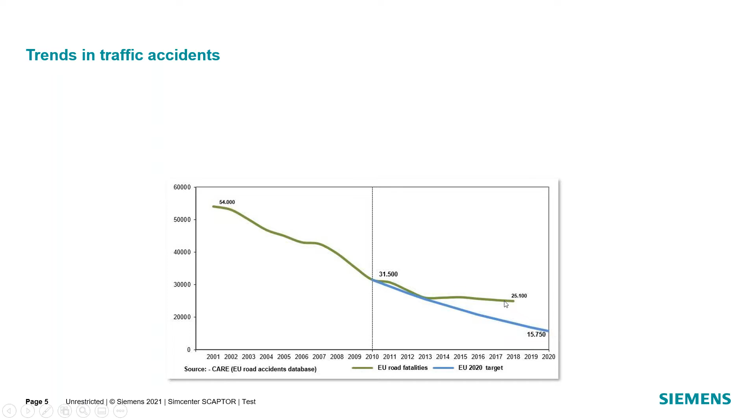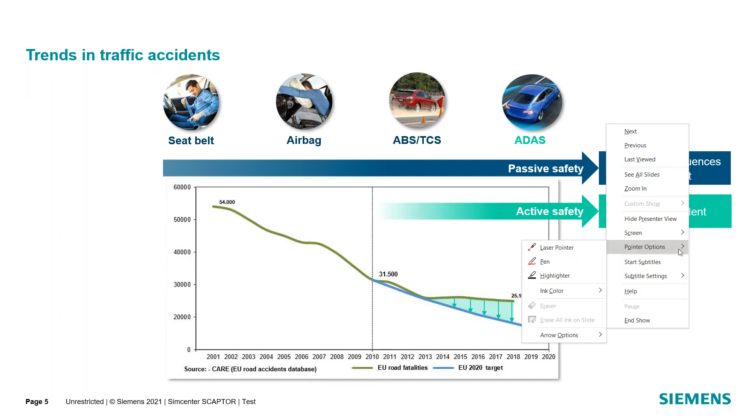The decrease was certainly due to passive safety measures such as seat belts and airbags, ABS, traction control systems, and whatnot to mitigate the consequences of an accident. But it became clear that to gain any more improvement, there was going to need to be something else, some active safety measures to prevent accidents as well as the passive measures. So that's where ADAS came in. This acronym stands for Advanced Driver Assistance Systems. That could be things like automatic braking or lane keep assist. Maybe some of you have these systems already on your vehicle.

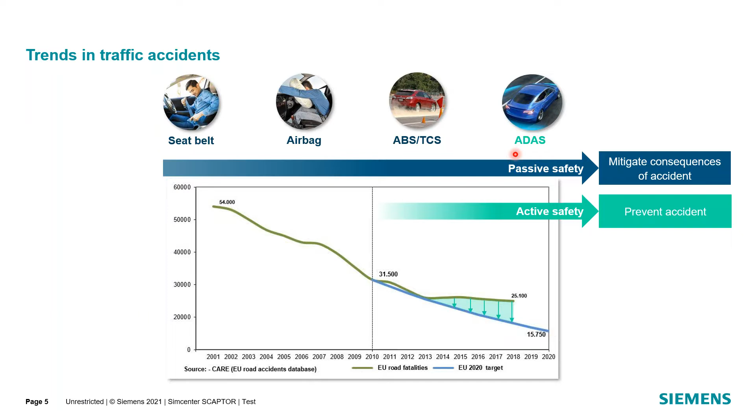So that is one step towards preventing deaths from accidents, but as well, many of you probably know there's big work being done right now in autonomous vehicles, so completely full robotic taxis, basically. And we can classify it. The SAE came up with six categories, going from level 0 to level 5, defining different levels of automation. Level 0 being no automation, just driver only, all the way up to level 5 where it's full automation, like that robo taxi, that dream you have of falling asleep in the car and waking up at your destination safely.

We're not quite there yet, but we're working towards that goal in the industry. And a lot of vehicles, I'd have to say, we're firmly in level 1, Charles. Wouldn't you agree? Yeah, I would say. I mean, a lot of vehicles do have the auto cruise and automatic braking, lane keep assist, things like that.

But as you can see too, I would think you agree, guys, the sensors required to reach level 5, as you can see from the graphic here, steadily go up, and that's some of the things we're going to talk about: the process of getting to level 5 at some point in the future down the line, and what type of sensors we need to be able to achieve that goal and capture that data.

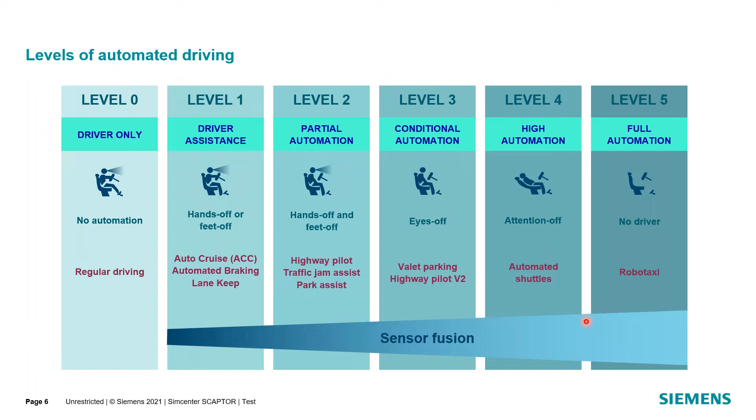I guess along the way too, we should talk about the development process. A lot of times when we talk about vehicle development, software development, you may see a V diagram for the development process. Whereas here, when we talk about autonomous vehicle development, we like to think about it in this closed loop process.

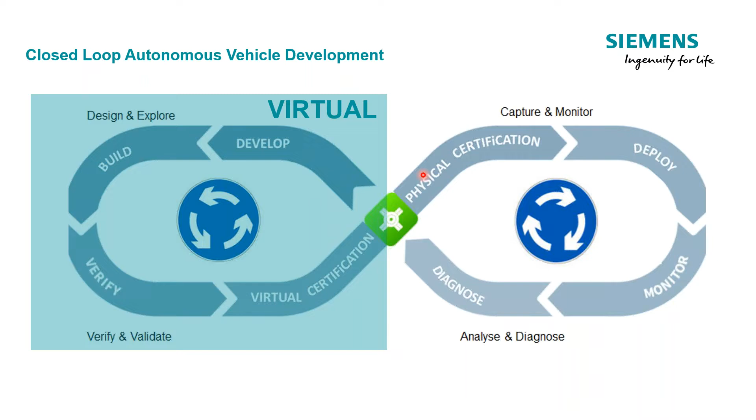So we would maybe start here in the virtual side of things, developing our sensors, our vehicle, our algorithm, verifying how things are going to function virtually, doing some certification work, and then we would move into physical testing of the systems that we develop. By deploying it into the field, we would monitor how it behaves in different scenarios.

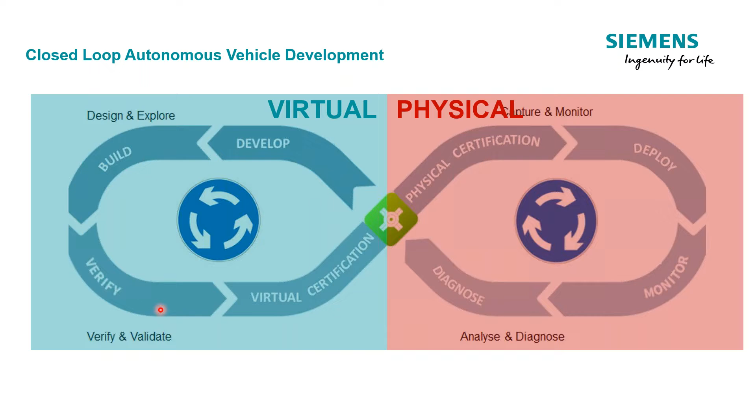Inevitably, there are going to be scenarios that the vehicle or the sensors don't interpret correctly. So we need to diagnose those, and then we go back once again into the virtual development cycle to make further improvements. And Tony's really going to focus on this Simcenter Prescan360 family of products that handle this virtual side, the development of autonomous vehicles.

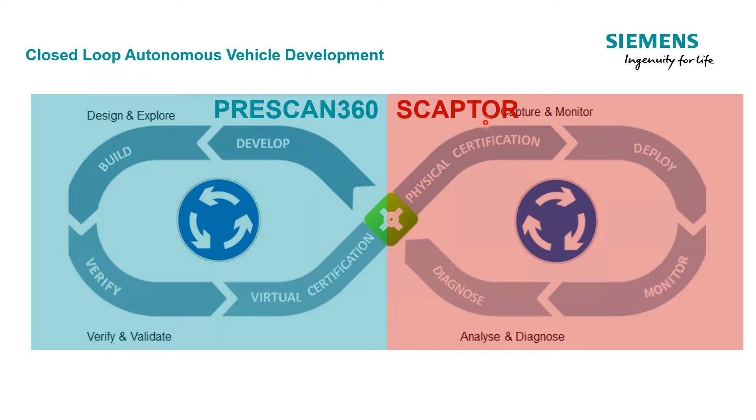And Scott and I are going to focus on what happens on the physical testing side, where we use our Scaptor solution. And if you're not familiar with Scaptor, hopefully you will be after this presentation, but it kind of stands for sensor capture, right? Capturing data from all these sensors that are utilized in autonomous vehicles. And talking a little bit more about the sensors that we need to use and why so many.

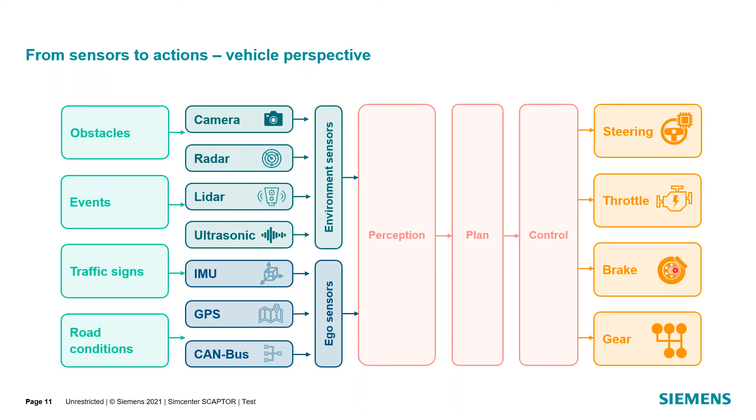And all these sensors together help us to perceive what's going on around the vehicle and on the road. And then we can plan action for the vehicle to take. And once we do that, basically we're talking about controlling the vehicle, be it a steering input, braking, whatever the case may be.

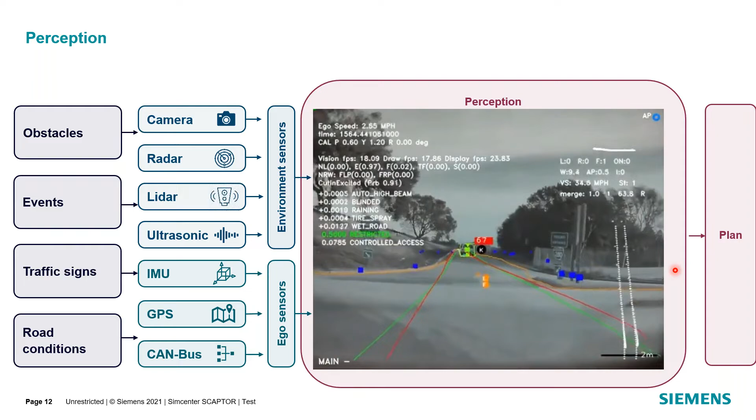And to give you an example, I have a video here that highlights some of the perception data that you would be able to acquire from all these sensors and what it needs to do, such as reading the stop sign there, noticing the vehicle that's in front of it, staying within the lane as it's going down the road, making turns, understanding the best route. So all of that perception is going to be coming from the data that we acquire from our cameras, our radars, our LiDARs, etc.

So some keys to some of the things that Charles said is you have this data explosion. Just like he mentioned, there are all kinds of sensors, and the further we go up those levels that he spoke about, once we get to that level 5, there's quite a few sensors that are going to be needed, and they're going to be multiple types of sensors. So you have this multi-sensor fusion, and all of these sensors need to work together and communicate together in order to be able to make the same type of decisions as a human driver.

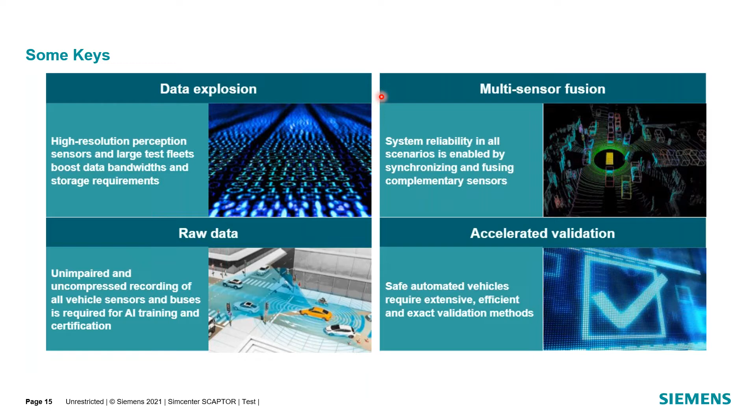Go ahead, Charles. Charles is controlling the PowerPoint we're sharing here.

So we want to get that time synchronization across all of the sensors as it's collecting that data and as we go through different driving conditions. It also timestamps the data. So if you want to mark specific events, then all of these sensors are timestamped together. And we can say, I want to look at all the left turns taken during this 8-hour drive shift. And we'd be able to do that with this system.

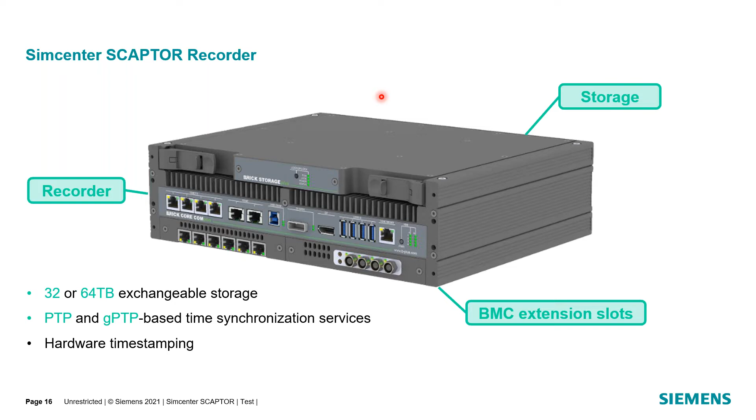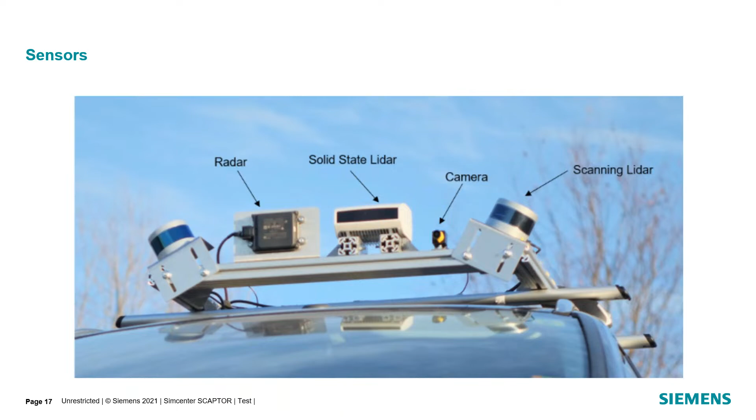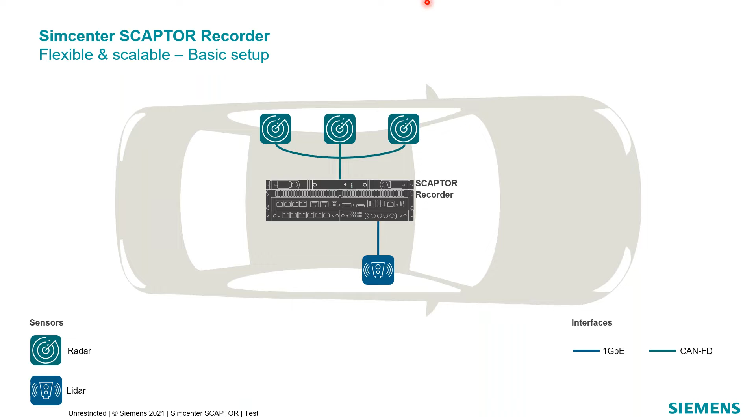So with the Scaptor system, what we want to do is bring this all into the same system, all into the same language. And this would be a basic setup where we've got maybe 3 radar systems and a LiDAR. And so I can bring all of these into the Scaptor under an Ethernet communication, directly plugging these into the system itself. We'll keep coming back to this slide and show you, as the sensors expand and get more complicated, how we bring those all together to time sync the data. But this would be a basic setup where I could use the Scaptor to start recording these 4 sensors.

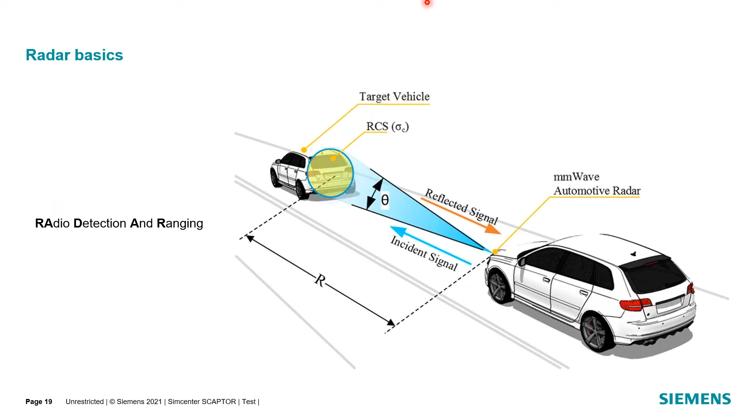So if we talk about radar and some radar basics, we're going to look at some of these different sensors and some of the strengths and weaknesses that they have. Radar, as you can see here, uses radio detection and ranging, and so it will send out this radio signal, that's the incident signal, and the reflected signal then comes back for interpretation. It'll give us some relative distance and size and show us where that potential obstacle is in relation to the vehicle that we're driving or testing. For example, this is used a lot for adaptive cruise control, where we can see how far that vehicle is in front of us. We set a distance for that adaptive cruise control of how many car lengths we want, and then the car will adjust speed to keep that distance from the vehicle in front of us.

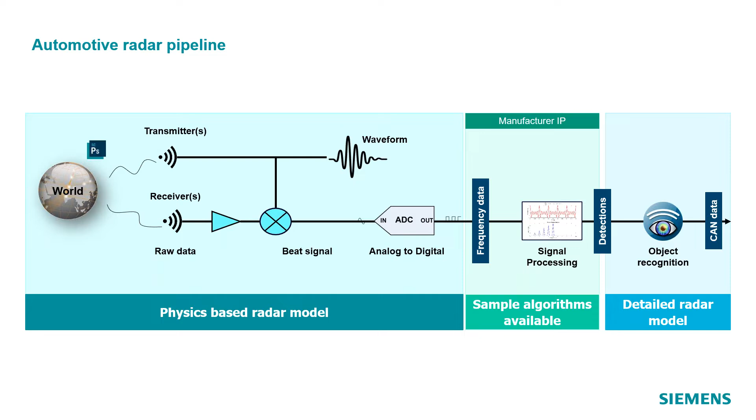The 2-dimensional FFT is going to give you data in both range, as Scott was talking about, but it also gives you Doppler. So what is range and Doppler? Range is obviously what it says: how far away is the object. And Doppler is the speed of objects relative to you in the longitudinal direction only. So it does not pick up perpendicular speed. It only picks up speed relative to where you're going. So when you look at a range Doppler, you're seeing how far away, but also how fast things are either moving towards you or away from you.

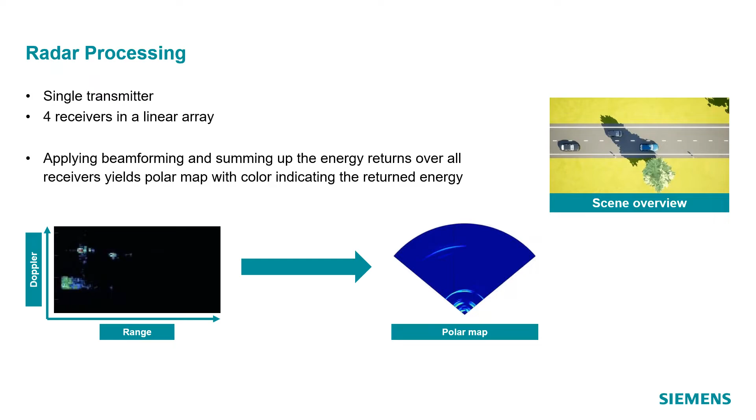So in order to get to that, you have to do this 2-dimensional FFT, so that you see that on the bottom left where we have a range Doppler as time is going on, and those dots more in the top are coming from the vehicles, and that cluster at the bottom left is everything in the scene not moving. Now, you can make a more complex system by using 4 receivers in a linear array and then making a polar map, and that's what you see on the right. So there's a lot that can be done with radar, but let's see a situation that really happened in the real world, but we weren't sure why it happened. So next slide.

All right, so this is going to be a movie. What we'll see in this movie is from an actual vehicle, a Tesla 2016, so this is real. You'll see a camera and you've got a car in front of you, and somehow we stopped in the Tesla, even though we couldn't see the car in front of that. So the Tesla saved an accident from happening. Now, how did that happen? Well, we looked at it and we knew that it had to be the radar, because with the camera, you couldn't see the car in front. So how did the radar do it?

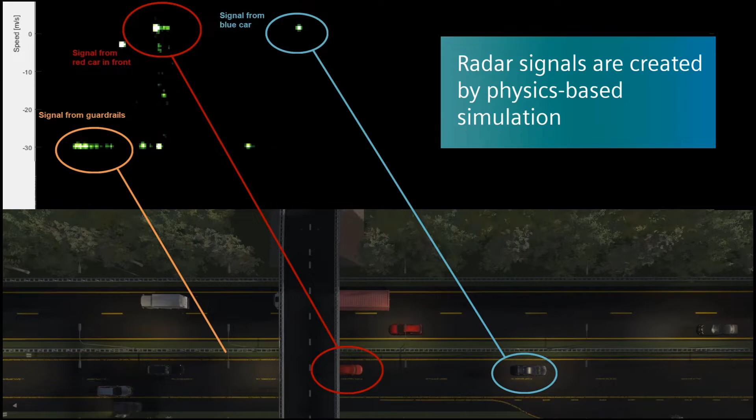So what we did was we created a simulation of it. We figured out the radar was a Bosch. We put in the parameters and went about the process of trying to figure out how it did it. Now you see the range Doppler on top, and can you pause here? It just disappeared, but that's okay. So you'll see that we have the red car in front of us producing the red dots in the range Doppler plot, and the blue circles, there's dots there. Right now for the pause it's not showing, but they are there. Trust me.

And I think we muted you.

So how did the radar get those dots? Well, because we could simulate it, we were able to figure out that the radar signal went under the red car, which was in front of the Tesla, bounced to the next car, came back under, and back to us in the Tesla. And right now what we see is that the blue car and dot is pretty far away. Range is the x-axis, so that's pretty far away. And the two sets of dots, the blue dots and the red dots, are near zero, which means they're going about the same speed as us.

And now when we start the movie up again, watch what happens to the blue circle of dots. They're going to come down and to the left, which means they're getting closer, and they're going slower than we are. So if you could start it up again.

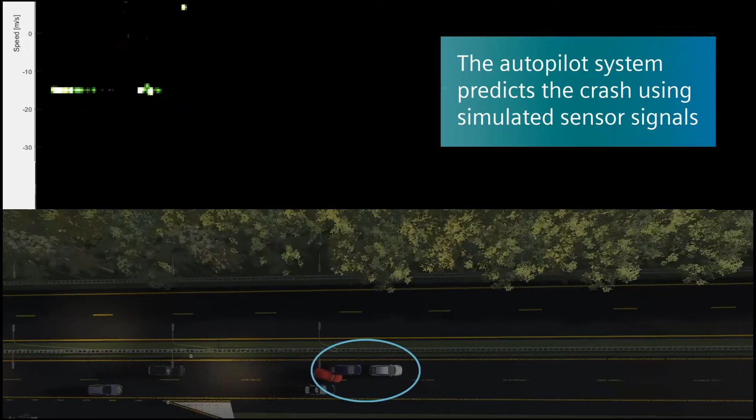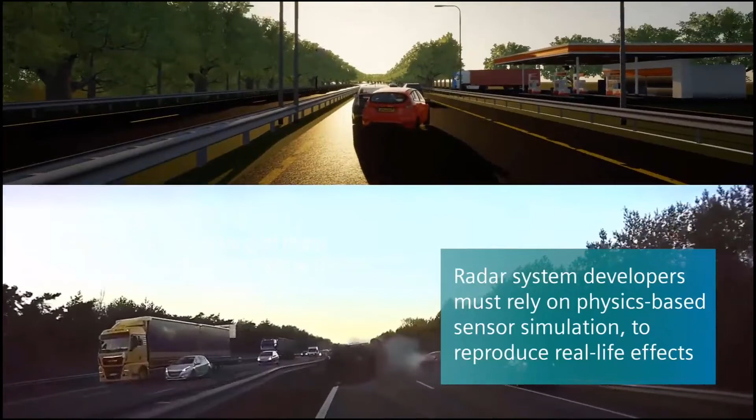And so what you'll see, here they go, okay? And what happens is, in the Tesla, the algorithm saw dots that we're getting closer to, and they're slowing down, therefore we've got to stop. So by shooting the signal under the car, we're able to see in front of the other car. So pretty cool thing, and we were able to figure it all out.

One sensor that is sometimes confused with radar based on its ability to determine depth is, if Charles goes to the next slide, this. I guess here's something to talk about first. What percentage of vehicles in production have LiDARs installed? So not radars, but LiDARs. We want to hear your opinion. We'll launch a poll for the audience to participate. And we have both extremes here as choices. It's either 99% or less than 1%.

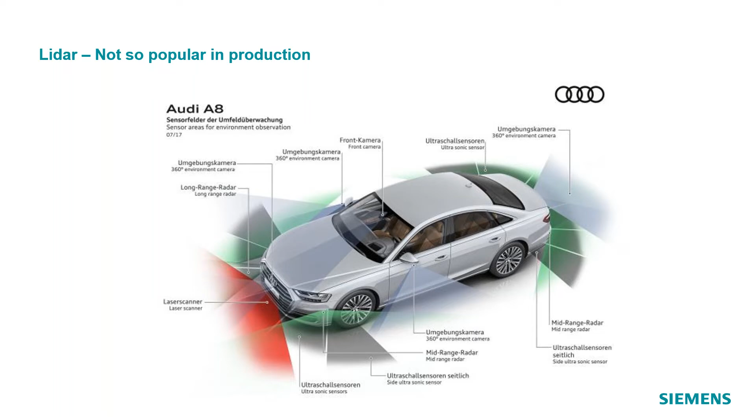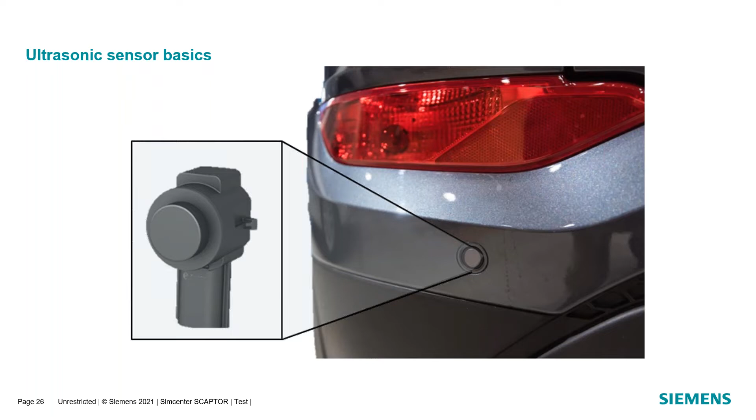The ultrasonic sensor is a sensor that actually uses sound at a high frequency to determine proximity. You can see these sensors on a lot of vehicles today that help with backing the vehicle up. Some have it on the front bumper for pulling into a garage or parallel parking to see the vehicle in front. And the ultrasonic sensor uses a high frequency noise, higher than what we can hear as humans, so we don't constantly hear these ringing tones, to determine the depth or proximity of the vehicle to an object.

And they're obviously very good, independent of daylight. They work well at night or on a bright morning. So those are great sensors that help with proximity as well. Okay, another. Go ahead, Charles. I think you were going to take the lead there.

Yeah, LiDAR is a pretty popular topic. I think some people in the audience are aware that this wasn't always Elon Musk's preference for autonomous vehicle sensors. He didn't really like LiDARs. And we'll come back to that radar diagram in a second and talk about the strengths, but just wanted to show you an example of a LiDAR system.

And that's just an acronym. It stands for light detection and ranging. And basically, oversimplification here, but it's just sending out a laser, right? And it gets a return, and based on the time of flight of the return signal, it can get a depth, and it just scans across an area, right?

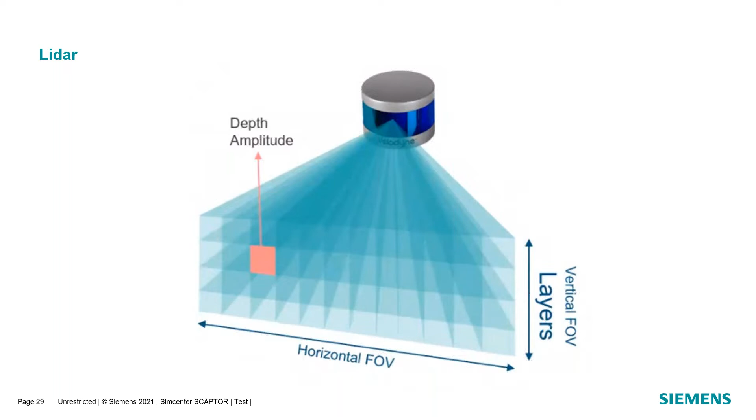To basically map where an object is, how far it is, and basically its size as well, where it's located in the space. And some examples, maybe you've seen them on some vehicles, these scanning LiDARs on a lot of vehicles that may be involved in autonomous vehicle development. They're quite large, lots of moving mechanical parts. So you can imagine this would be difficult to package in a vehicle and expensive and probably not too robust with that design.

So what has happened in the industry with advancements in LiDARs is the solid states, where they've basically simplified the system and gotten rid of all the moving mechanical parts that were used to move this laser beam around to scan an area. With this solid state, we don't have those moving mechanical parts. It's far more robust, and obviously you can see the size as well. It's an improvement from a packaging standpoint.

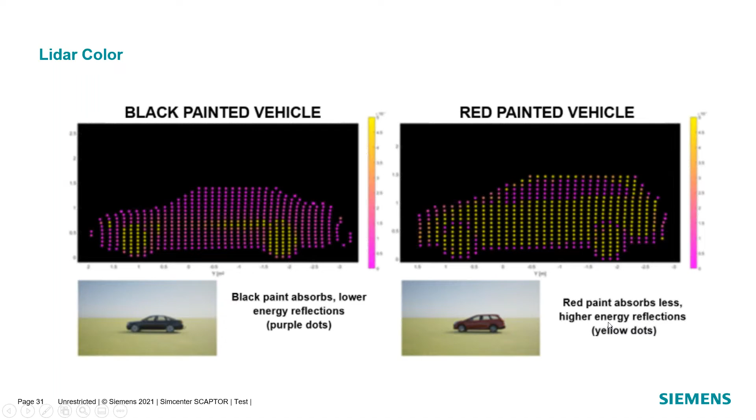And when we talk about LiDAR, some of the considerations we have to think about is, if you see this image, we have an image of a vehicle that's painted black and a vehicle that has red paint. And we can see that laser energy has a difference in energy reflections because of the black absorbing more than the red. So that's a consideration that we have to deal with with LiDAR.

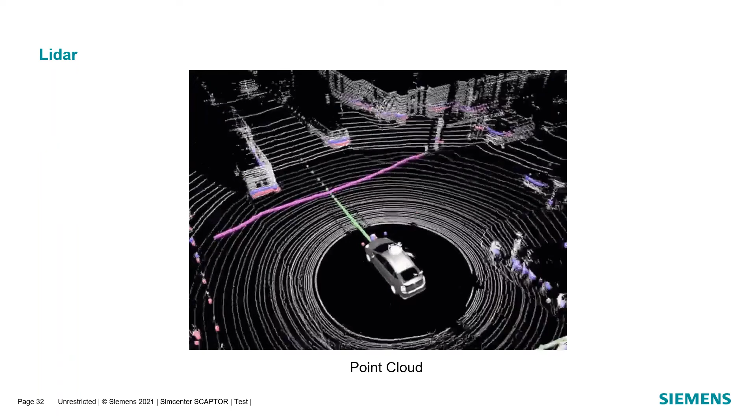Here's an example of what we would call a point cloud. This is the data that we would get from our LiDAR scanning the environment. I've got a still picture here, it moves pretty fast, kind of hard to see what's going on. But as you can see, our LiDAR is able to identify people, buildings, vehicles, as it's scanning the environment as this vehicle is moving down the road.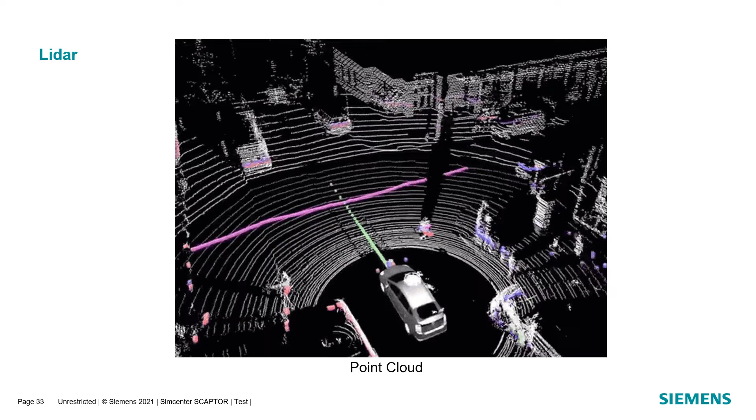So LiDAR, I just want to make a quick comment here. Please do, please do. Key features of LiDAR relative to radar, and it's in your little graphs there, is what's called azimuth resolution. You can see resolution there. Resolution generally means azimuth, so that is, let's say, lateral or perpendicular. So the resolution that it has is much greater than radar.

Now, radar is coming up. There's some new radar coming out that's going to try to get closer to what LiDAR resolution has, but they're not out right now. The radar that's in all the vehicles, which is much more than 1% of the vehicles, by the way, doesn't have that kind of resolution. So just wanted to comment on that. No, it's a good point. Thanks.

And now another sensor that we would see a lot with autonomous vehicle development is cameras. And obviously with cameras, if you look at our radar diagram, there's some pluses here. Good for resolution, but maybe daylight independence, we could see that could be a problem for a camera, right? It's not as accurate at night. But classification is very good. We can clearly recognize people and signs easily with video images.

And some considerations, though, when we're talking about using cameras with our autonomous vehicle acquisition, are some of the things we already talked about. The huge amount of data, like these cameras that acquire raw data. Usually there's two formats, GMSL2 and FPD-Link, and they're just serial cameras. The data is serial. And what we need to do is to be able to timestamp it and sync it with all the rest of the sensors. We use the IEEE 1588 protocol for time synchronization. So we have to get them into Ethernet packets.

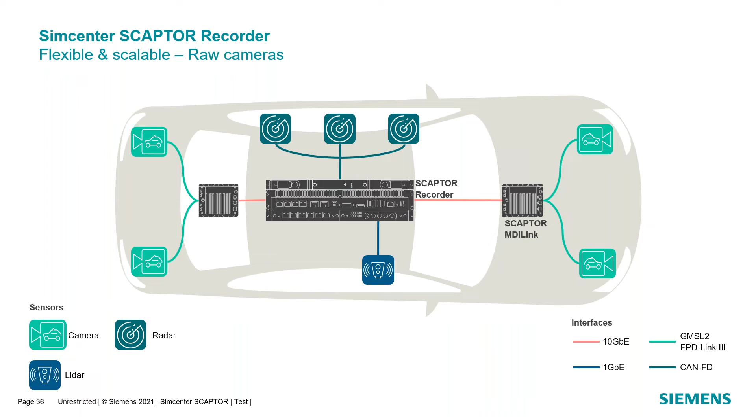And another point with regard to synchronization is this SCAPTOR MDILink is located external to the SCAPTOR Recorder, so we can get it closer to the camera so that we can timestamp that data sooner when it's coming into the system, even for the vehicle, for synchronization purposes, to get it down into the nanoseconds of synchronization between all of the sensors utilized.

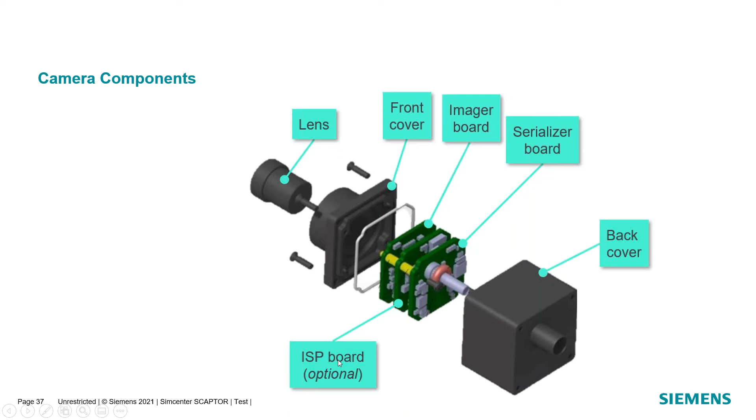And if we dig into the camera components, obviously the physical components of the camera, the lens and whatnot, play a role in the quality of the images you get. But there's also, in some cameras, this ISP, image signal processing board, which also plays a role in improving the quality of the image. One example would be for exposure.

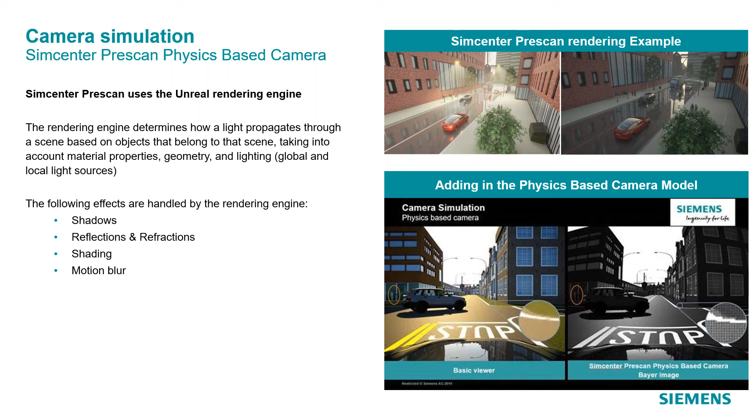Appreciate it. And Tony's going to show some more stuff with regard to simulating these autonomous vehicle situations a little bit later.

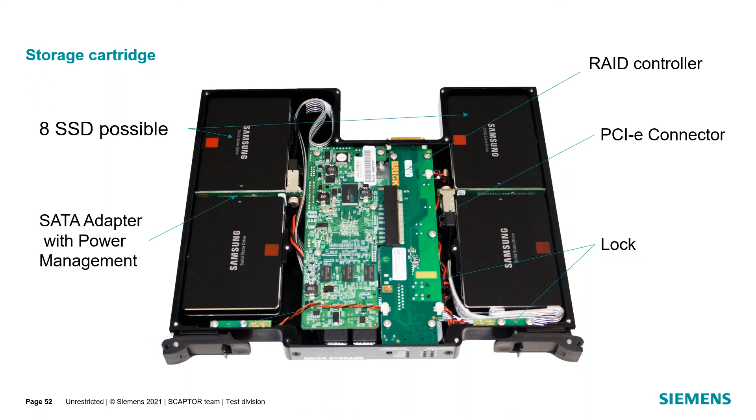Yeah. So if you saw the 32 terabyte and 64 terabyte cartridges that we offered and thought that was a lot, maybe this changes your perspective a bit. It adds up fast. That's right. Here's a little picture behind the curtain there of those cartridges that we use for recording the data.

Although there are stereo cameras. Subaru's a big proponent of stereo cameras. Some other companies, not too many, that can add in depth or range. It won't get the same results as, let's say, ultrasonic or radar or lidar, but it definitely lifts up that depth on camera when you use a stereo camera. Okay. Well, there are some options.

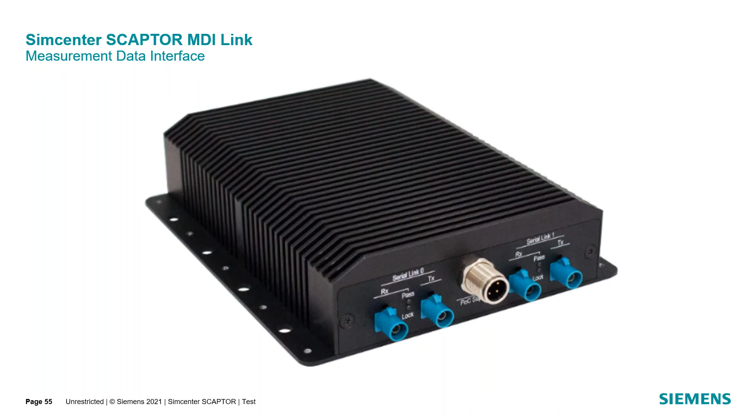And I guess I'll let you talk a little bit more about how things work with the fusion of all these sensors. Sure. So this is that MDI link that you mentioned earlier that is used alongside the cameras and bringing that data into the SCAPTOR unit. And what this does is converts that camera data to Ethernet data. And the nice thing about that is those Ethernet packets then can be time stamped. And the SCAPTOR system uses IEEE 1588, which is a time stamping certification that keeps things together.

So it brings that camera in, and you can see it converts it to the Ethernet packets there. It has the redundancy check, and then brings that into the SCAPTOR at a high gigabit rate, 10 gigabit rate there. And like we said, that's for the time stamping and keeping that data together.

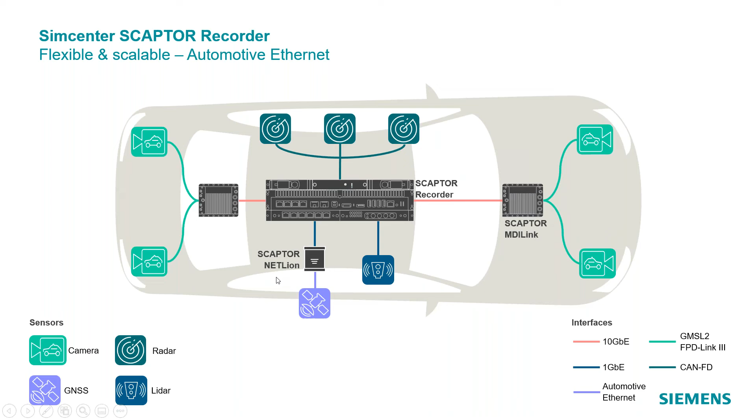And we can expand this setup. So we had that first kind of basic setup, we started with this slide where we had the 3 radar units and the LiDAR unit. You can see here now we've added cameras, 2 at the back and 2 at the front of the vehicle using those MDI links. There's also what we have as an intermediary device known as the NetLion. The NetLion takes automotive Ethernet and converts that to conventional Ethernet.

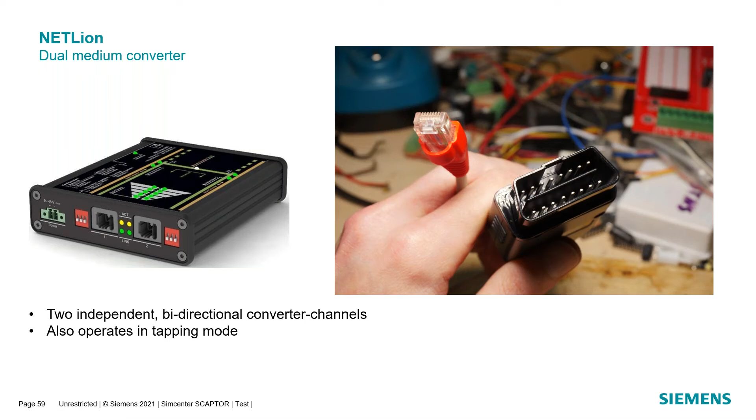And the reason for doing that, again, is for the time stamping, but automotive Ethernet is actually different than the conventional Ethernet. So the automotive Ethernet needs to be converted, and then we can again synchronize that data over the conventional Ethernet. And all of this is to get all these sensors lined up and synchronized in terms of time with a 1 microsecond or less discrepancy. So that's pretty good, I would say. You're looking at everything synchronized, bringing that into your algorithms and making sure the right decisions are made.

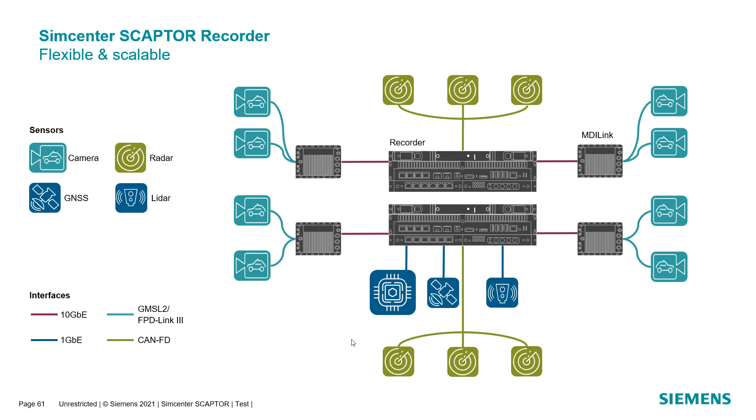And as the vehicle sensors increase and the setup gets more complex, the SCAPTOR system can accommodate that. So here is a setup where actually 2 different SCAPTOR systems are being used based on the number of sensors in the vehicle, where we've expanded it to now have 6 radars, a LiDAR, GPS, vehicle CAN, 4 cameras front and back, and we can bring in all that data and synchronize it and view it all at the same time, tag it for events that we want to monitor, whether they be right, left turns, vehicle stops, any condition that we can think of, we can look at that and tag it and go through that information over a given test sequence.

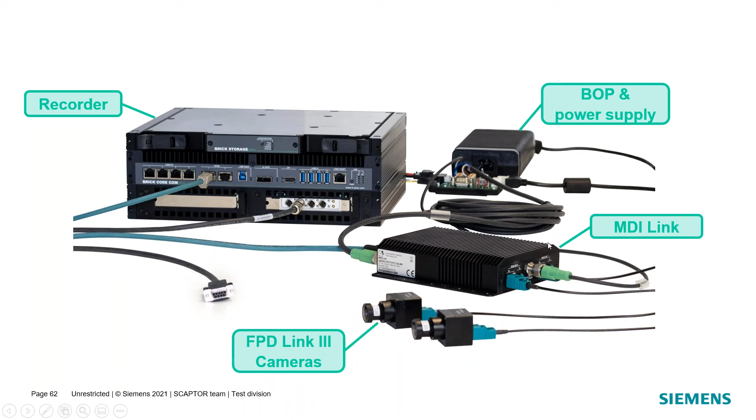And here's the software. Charles, do you want me to switch and show an actual recording we have? Sure. Here, let me make you presenter. Okay. I'll say show my screen.

I don't know if that's coming through okay, Charles. I don't know if you can see that. Yeah. I don't think it's too much lag to the webinar.

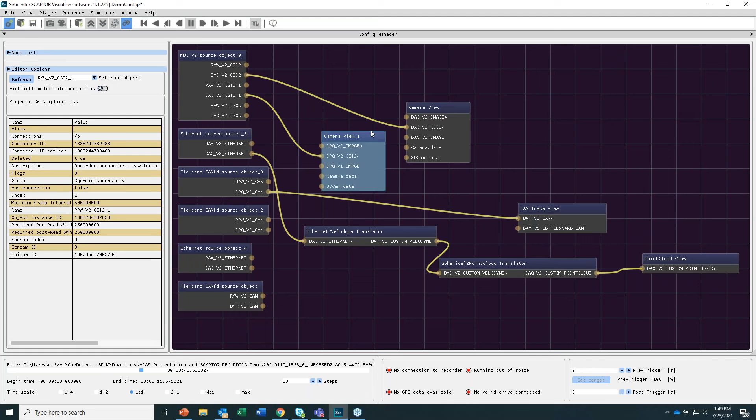Yeah, and it's kind of nice. When I set this up, I can have the objects and I kind of make this viewer for what I want to see. So you can see I've got the 2 camera views and the data where that's coming in on the system, along with the LiDAR here and the translator to the point cloud, and then the CAN FD. So as I kind of fill the ports available in that SCAPTOR system, I can make these different viewers to look at that data here.

When I play through a file, everything again is synchronized, and I can view this, which is really nice. Okay. And then this data, once I make sure everything's okay, I can pass it on to Tony and his team to work with it and compare it to some of their virtual data to enhance those algorithms going forward. I think that's a good transition for us to make Tony the presenter to kind of expand on that a little bit more.

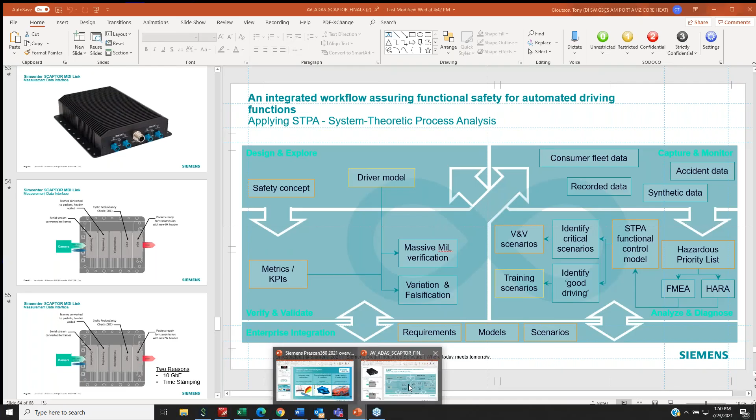And hopefully you can see my screen right now. Yep. Yep. All right. That was a great segue, by the way, Scott.

Okay, in the background, you can kind of see that infinity loop that we talked about earlier. And what it is, again, on the left, we're kind of doing virtual. On the right, we're kind of taking data collection. There's a lot more going on. You see recorded data. It's an integral part right up there. And there's also some synthetic, but we're going to start feeding back around and doing a lot of functional safety, making sure we don't have hazards and things of that sort.

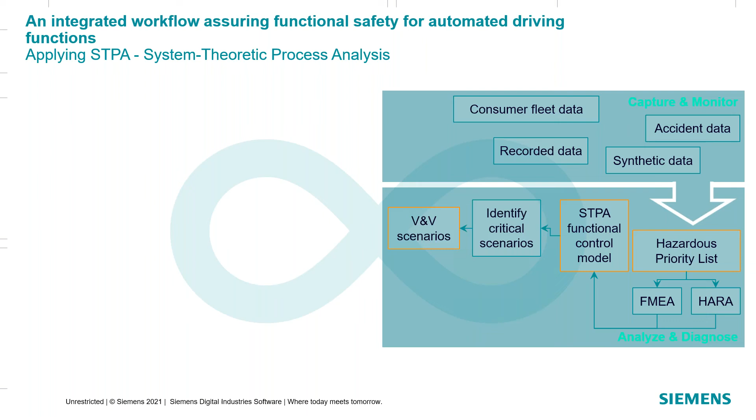As we fill this in, what we're going to see is that we're going to take recorded data, and if we go around, so we go down and to the left and up, we're going to get to massive verification. Okay, you see that on the left there, and we have metrics and KPIs. So how do we go about doing that? I just want to give you an example of that. It's a lot more detailed, but I'm trying to make this as simple as possible.

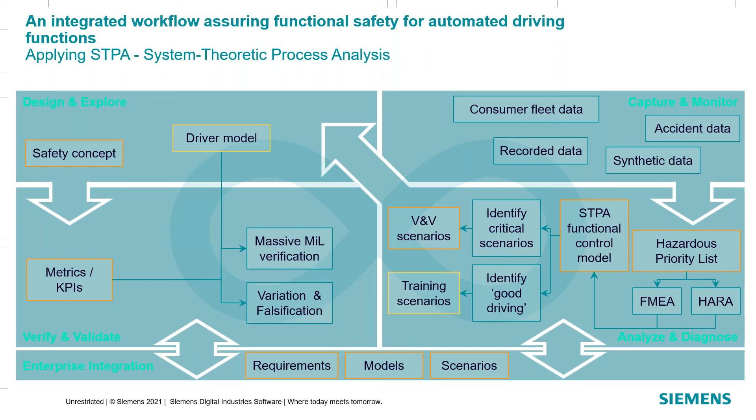So the first thing we need to do is, out of our collected data, potentially find situations that might be of interest. Close crashes maybe that happened, or something of that sort. So here's one, okay? We had a 3-lane road. There's a kind of a curve. And in the 3-lane road, you can see our car is in the middle lane.

We have a car coming up on the left, so that's not going to allow us to go into the left lane. And on the right, we have a parked car with a person getting out and another car coming up on it, and it's going to cut in, okay? So this was sort of the scene that we found from collecting data, sort of a close call, right? Well, we can always change the scene. Well, how do we do it? We can't go back and collect data. We have to do it virtually, and that's what we do.

So in our car, our Ego vehicle, we have a radar automatic emergency braking system. So it's going to brake if it thinks there might be an accident coming, and it's using both short range and long range radar. And what we're going to then do is change the speed of our vehicle and the speed of the cut-in vehicle. Now, by change, we're going to have to simulate it, because it's not really out there in the world. So we're going to change via simulation.

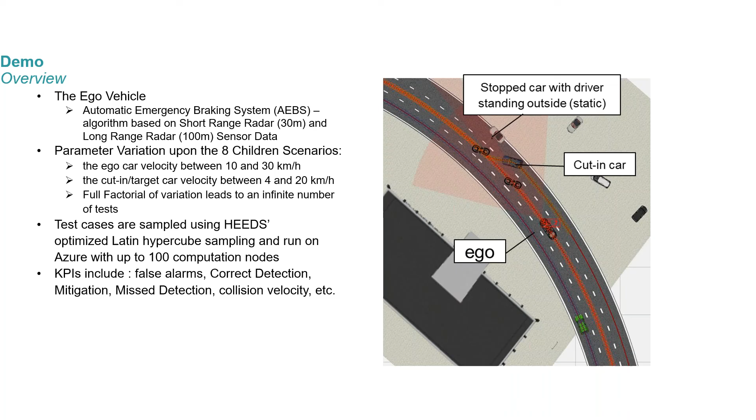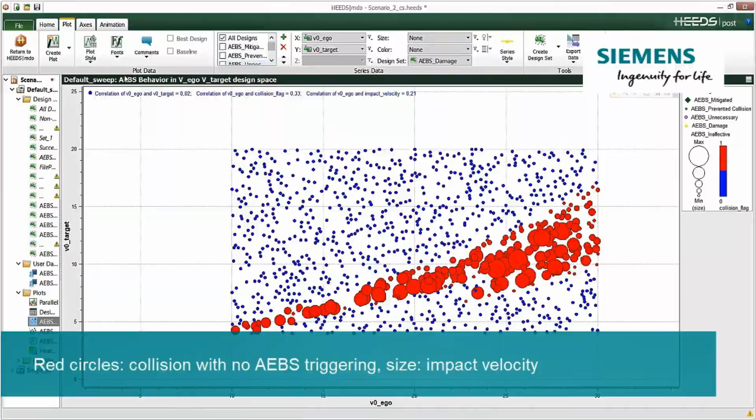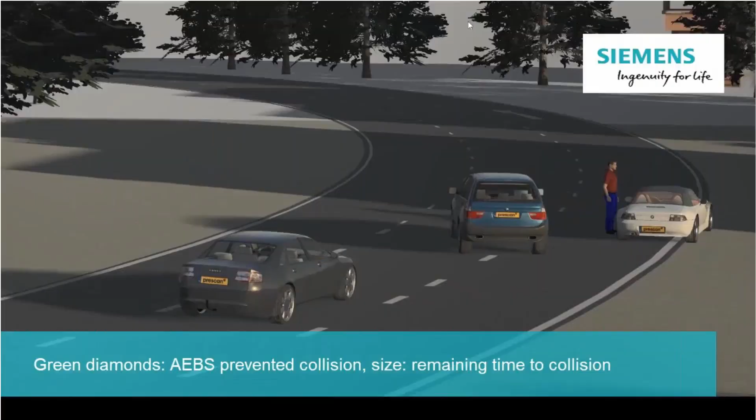So we just went from one data collection to 2,500, and we found this situation, not a good situation, right? Now the next ones, these are all good. So we went from 1 to 2,500, and that entire swath is good. We put on the brakes and we avoided a crash. Now, how do we know that we avoided a crash? Because we can run it without the AEB system and we'd know.

So here's something else that's probably good, and that's what's called mitigation. So it reduced the crash. So we would have had a bigger crash, and notice how it's a very small crash here. So those are good. Now these next ones, I've been in auto safety a long time. These are not good.

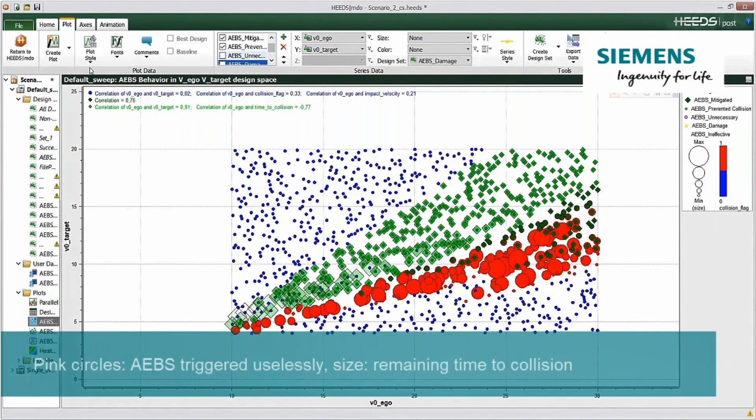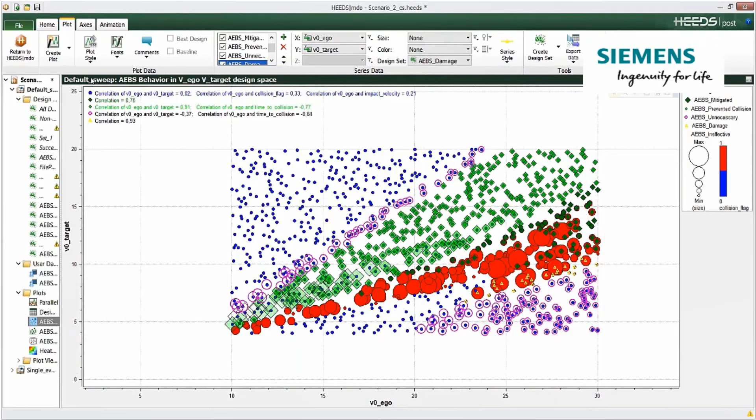These are what I call false alarms, which is slamming on the brakes when you didn't need to. So in this case, you can see the car on the right is not going to cut in. Why are we braking? All that does is potentially cause a crash. And then these last ones, these yellow diamonds, are really bad. By putting the brakes on, what we did was cause a crash. So had we not put the brakes on, we wouldn't have got a crash. So those, of course, are bad.

So we'll see that right now. So had we not put the brake on, we'd have missed that. But because we did, we caused a crash. And then the blue dots, nothing happened. So what we see is this colored plot. So we went from one real close call to 2,500, right? Now what we found is between the purple, the red, and the yellow, we've got a lot of situations that are not good. So we just went from maybe this isn't a good thing to a lot of not goods.

So we got to solve these. We got to change systems. We got to change algorithms. We got to do stuff. Maybe it's not possible in some situations. I mean, the car could just cut right in and there's no system in the world that can prevent the crash. So those are all things, though, that we can glean. So when we go from the real side of the infinity loop, get that data, we can then go here and expand our knowledge and also what we need to do to test and verify. Okay. And that is it.